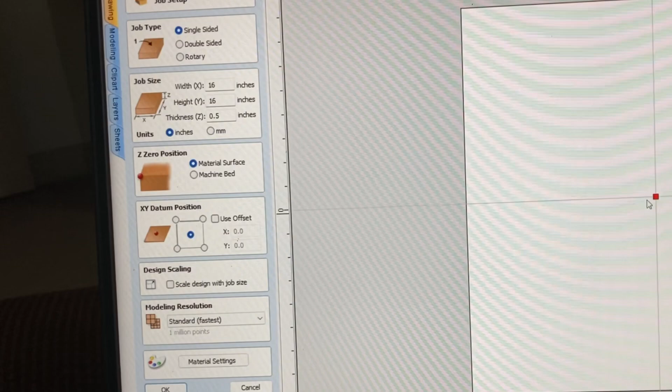I'm going to start with a brand new file. I'll click New File. This is going to be a single-sided project, and instead of doing a 30 by 30, I want this set at 16 inches, and we'll make this 16 inches as well. We'll leave this a half inch thick, that should be fine. We'll do the Z0 position on the surface, and we'll start using this center point right here as our origin. Everything else will be fine.

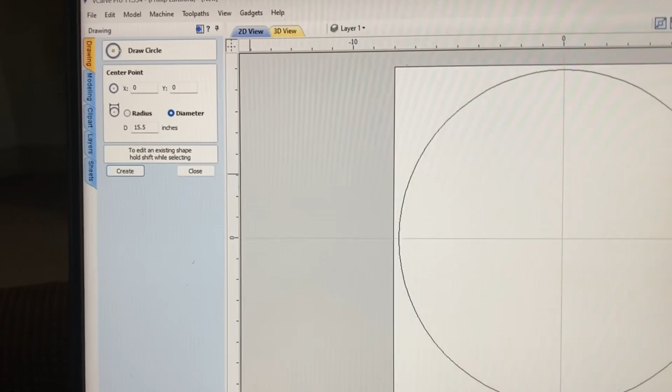We'll click OK. To make this clock, I want to start off with a circle, and this circle can have a 0 and 0 position. For the radius, we'll just click diameter, and I'll make this 15.5 inches. There's the circle right there, and that's going to be the basis for our whole entire clock.

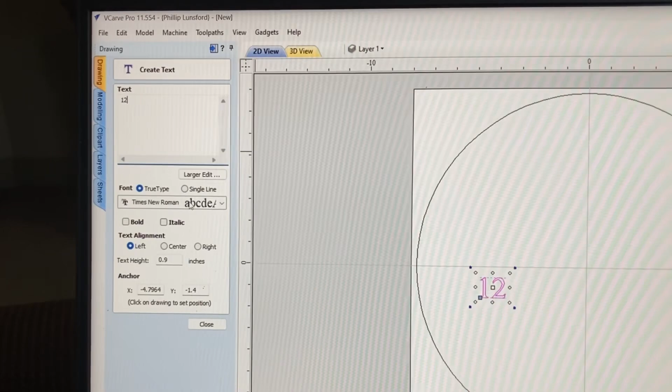What I want to do is put the numbers in here around this. I'm going to start right up here with the text, and I'm going to type in the 12. We'll keep this Times New Roman, that will be fine. So I'll click OK at this point.

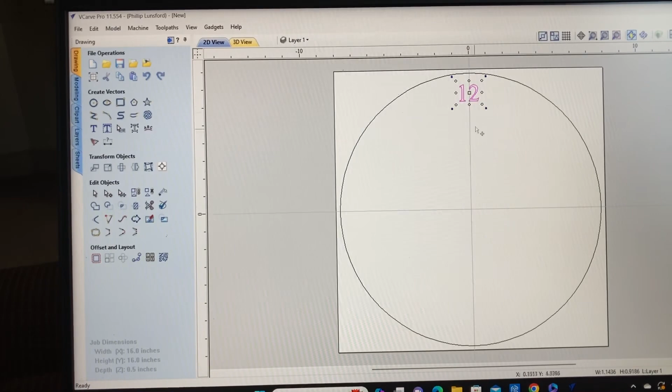We'll move these numbers right up to about there. I think that should be good, because I want a little bit of space here and I don't want to be too far inward. If you want to move that down a little bit, we can move that down a little bit. I like that.

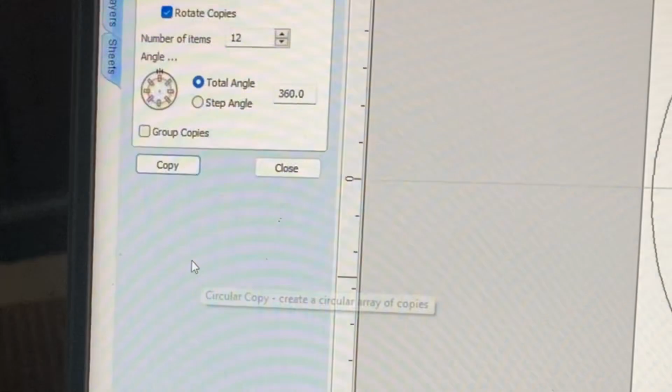What I want to do to get the rest of the numbers on here is just use the array tool. I'm going to highlight this number, and you have a circle array tool right down here. I want to rotate this around the center, so we'll put that as a 0. I want 12 copies of this, and we'll click OK. You can see how that puts the numbers all the way around, evenly spaced exactly the way you want it.

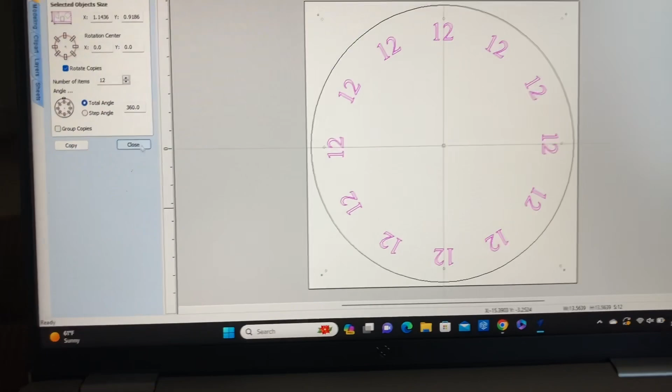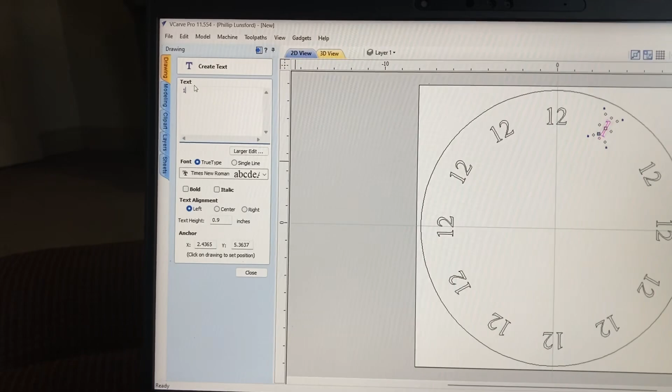We'll close this out. The next step is to change all these number 12s. Now we need to change it from 1 all the way to 11. Once you have this set up, we come back to our text menu and type in 1 right there. We'll repeat this process for the numbers 2 through 11 to have our clock face completed as far as the numbers.

So at this point, the clock is finished. The numbers are all the way around. But do you like the orientation of these numbers? Well, that can be changed also.

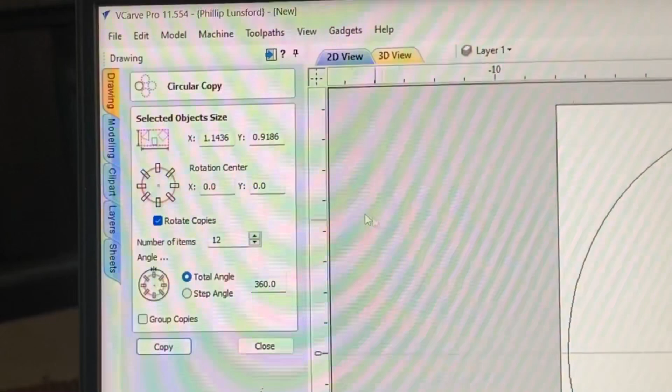Let's go back to the beginning. We'll start with our number 12 at the top center, the way we had before. As far as the first line, that's the size of our number 12 right there. The next one is rotation around the center - yes, we want that at the 0,0 position. But right here you have the rotate copies. When you unselect that, you see the orientation changes, and that will make a big difference on the clock.

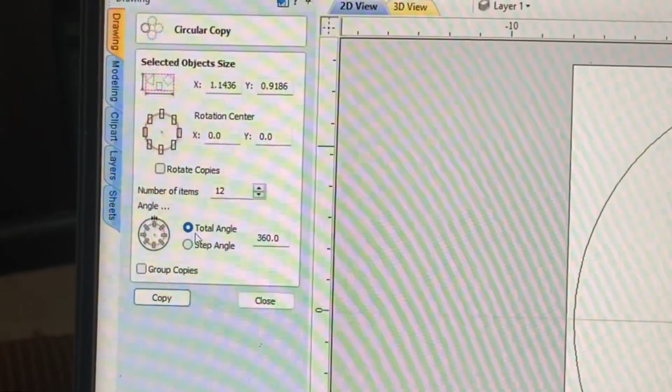Now we're still going to keep the 12 items, still going to do the 360 degrees. Let's make a copy. So now you see the numbers are completely oriented in a different direction, and it's all by that one click, rotate copies, having it checked or unchecked, and it makes all the difference in the world. I like this version better.

Just as we did before, I'm going to move around the clock face and change these numbers. Simply by clicking on the number, making the change, hitting enter, and moving to the next number, you can see this does not take long at all.

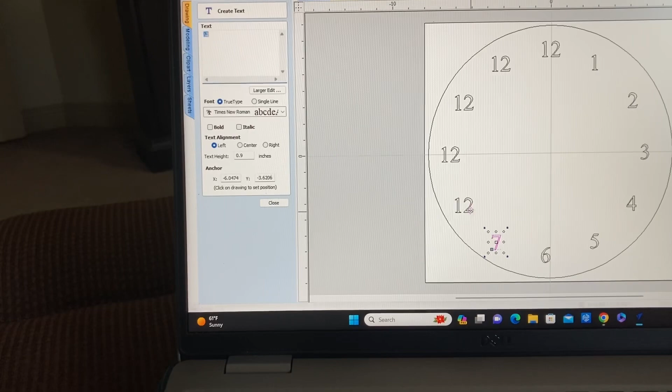So now that this is all completed, the only thing I don't like is this number 6, not quite centered. So I can highlight it and just shift it over. I have the alignment tools in place, they're turned on, so that just moves over and snaps in position. And the clock face is done and it looks great.

The next thing I want you to take a look at, when we did this array, this side is just a little bit bigger than the other side. Well, how do we fix that? The first thing we need to do is group this together. We'll select this right there, that groups everything together. To prove that, we'll click off of it, and then click one number, and you can see everything gets highlighted.

Now you can come over to this icon, select it, and we'll align to the material. You can see it shift over, and all of the numbers are now equally spaced all the way around.

So if we want to change the appearance of our clock a little bit, we can put an inner circle in here for an example. Let's come back over to the Draw Tool menu, select that, keep the zeros the same. I think I want to bring this in about 10 inches for the diameter. We'll hit Create, and yeah, that looks good.

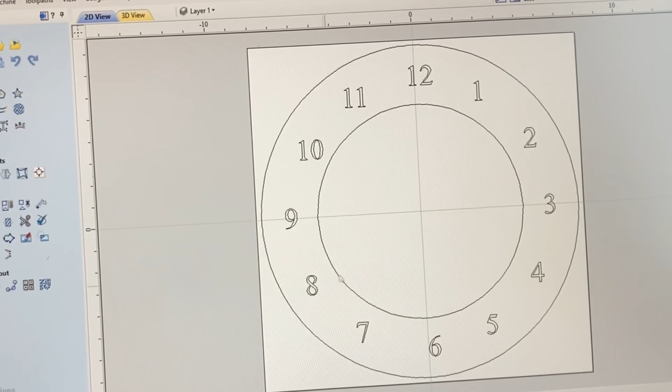So we'll close that. What happens if you want to have a double circle, where maybe perhaps a solid line through here? Now let's say we want to bring in another line about a quarter of an inch to create just a little bit of interest in our clock.

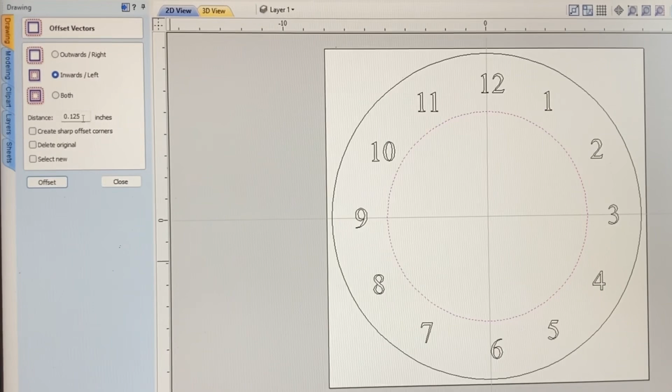So I'll click on this, come down to the Offset tool, and let's move this inward. Instead of 1/8 of an inch, we'll do 0.25 and create the offset. I think that looks good — this creates a little added interest in the clock.

But let's say you don't like it, so we can easily cut this and add another feature. For an example, let's create the little tick marks that will indicate each minute for the whole entire hour.

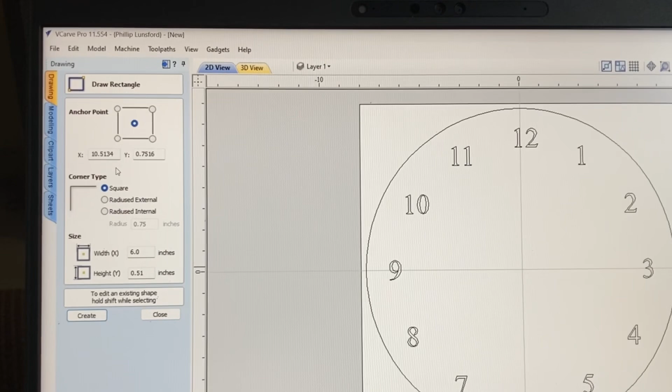We can do this very easily by coming back to the rectangle tool, and we want to make sure our anchor point is in the center with the XY at 0. From there, we'll move down to this section for the size of our little tick mark. We'll make it 0.125 on the x-axis, and on the y-axis let's make it 0.5, and hit Create.

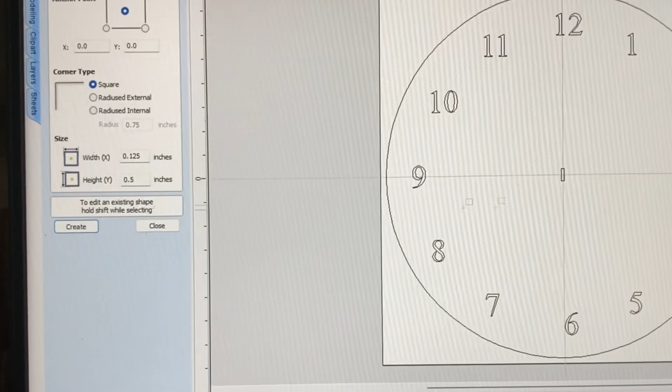When we do that, we have one tick mark right in the center. Let's slide that up where it needs to be — right about there, I think that will be pretty good. We can slide this up and down until you're happy with the position of it.

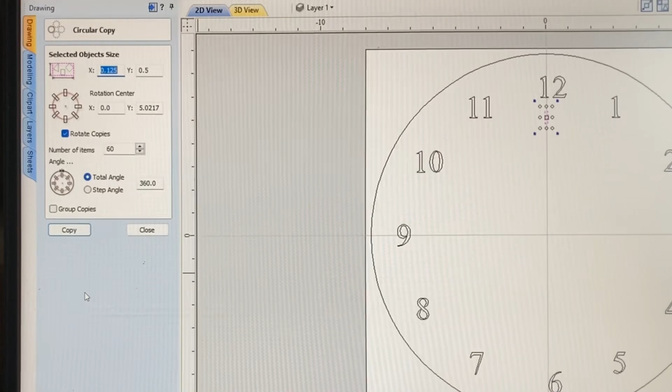Now that we're happy with it, let's move back over to the Circular Copy tool. We'll click on this — we have our tick mark highlighted, and that shows exactly the size of it right here. Now we'll come down to this section, and you see how this is oriented and how that changes.

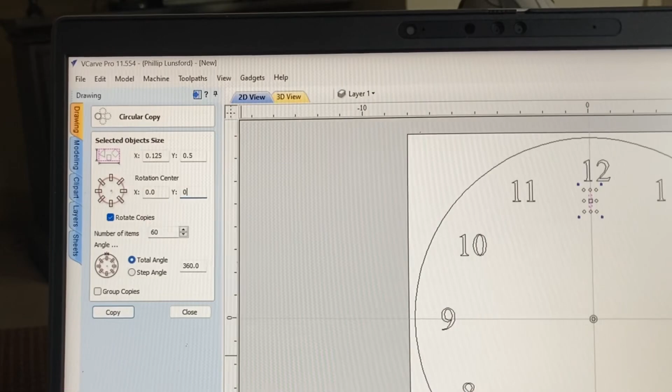Well, we want this checked this time — that's the orientation that we want. The rotation center we need to change to 0, so X and Y are both 0. We're going to make 60 copies, hit Copy and Close, and there we have our 60 little tick marks indicating each minute of the hour.

At this point, I've shown you several different types of clock faces that you can make. But let's create some toolpaths.

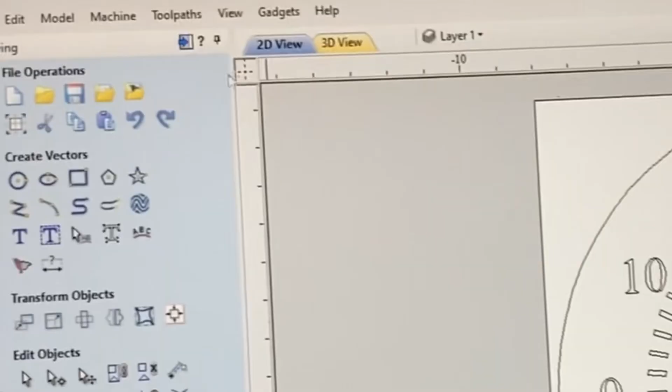Let's come up here to this little icon, click this, and move over to the Toolpath menu. The first toolpath I want to create is using the VCARVE. We'll click this icon right here, and we're going to start at the surface. I'm not going to put a flat depth in — we're going to be using the 60-degree V-bit, and we do not need a clearance toolpath.

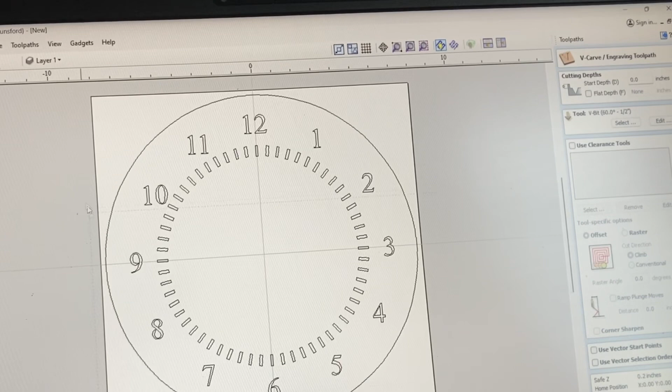Before we can calculate this, we need to select the different toolpaths. The easiest way is to highlight all of them, but I do not want the V-groove on this outer ring — we're going to set that up as a different toolpath in just a moment. The easiest way is to hold the Shift key down and left click on your mouse, and that will deselect it. Now I have all the items that I want.

I'll hit Calculate, and this will give me the toolpath I need to show the clock face. By hitting the preview, you can see what that is going to look like, and that's going to be pretty nice. Next, we need to set the profile cut to be able to cut the outer circle.

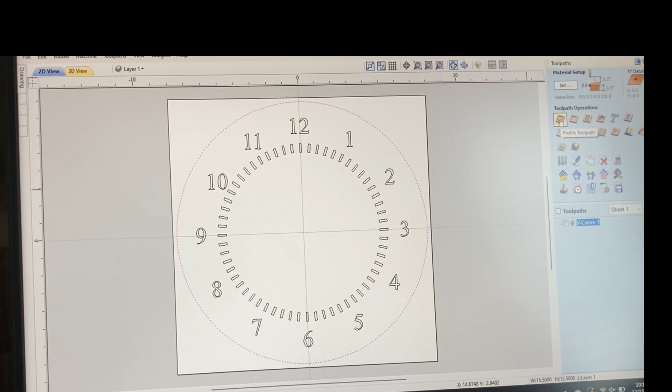So we'll reset everything, go back to our 2D view, and select just the outer ring. From there, we'll come over to tool profile, select it, and I think we're going to use a 1/4 inch bit. We'll start at the 0 cut depth, cutting all the way through at 0.5 of an inch, which cuts all the way through the material. The bit we're going to use is a 1/4 inch.

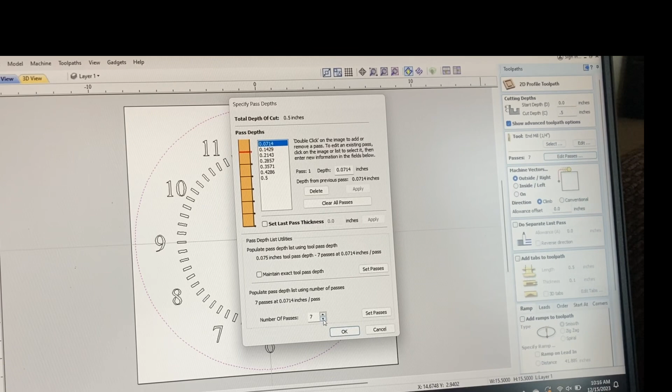We don't need 7 passes — I'm going to switch this down to 3 passes, that should be fine. We do want to cut this on the outside, and from there let's just hit Calculate. We'll do the preview, and that shows exactly what it's going to look like as far as the cutout, and that does cut all the way through.

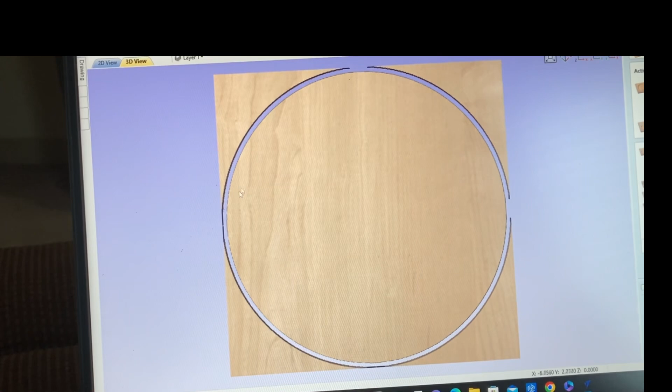Now we'll reset this and show all of our toolpaths, and there's our clock. You can also click on these outer pieces and they will drop out of view, and now you can see our completed clock face.